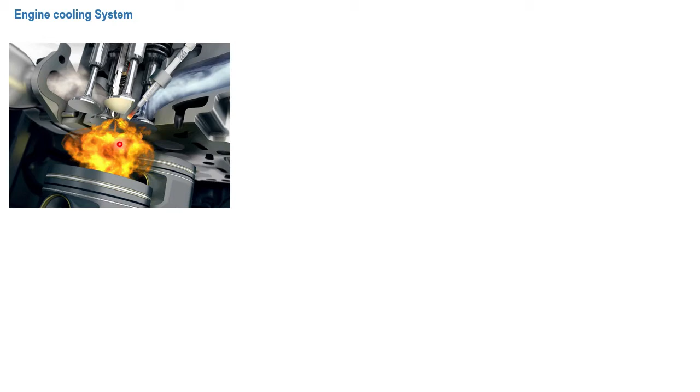Friends, before talking about the cooling system, let's have a look at this figure. This is the combustion chamber of the engine. In any internal combustion engine, the chemical energy from the fuel is converted into thermal energy, and the thermal energy is again converted into mechanical energy by moving this piston, then through the crankshaft, and the energy is available at the flywheel.

The fact is, the complete fuel energy will not be converted into useful energy, that is flywheel energy. Whatever energy is obtained by burning the fuel is not going to be converted into mechanical energy 100%. There will be so many losses of energy, so let's discuss which losses these are.

For your information, the effective mechanical energy available at the flywheel is 42 to 43% in present generation engines. What about the balance 58% of the power? That is wasted, and majority of this energy is wasted through the exhaust gases.

Then there is heat transfer through the cooling system, because the engine has to be cooled regularly, so a certain amount of heat is carried through the cooling system. Similarly, a certain amount of heat is wasted through the lubrication system, and some amount is wasted through friction. The engine contains many moving parts: pistons, crankshaft, connecting rods, turbocharger, valves, fan, water pump, and so on. To move all these parts, a certain amount of mechanical or frictional energy is consumed. This is called frictional loss.

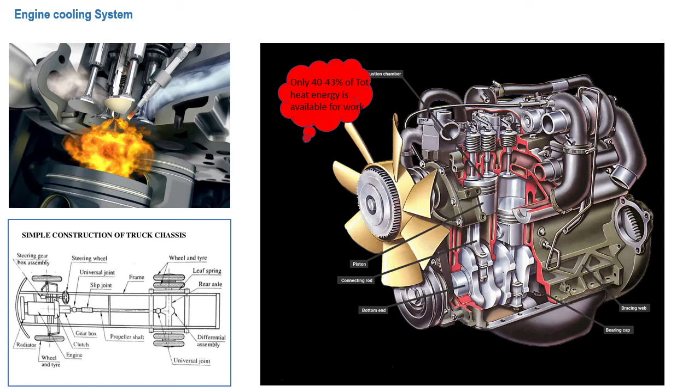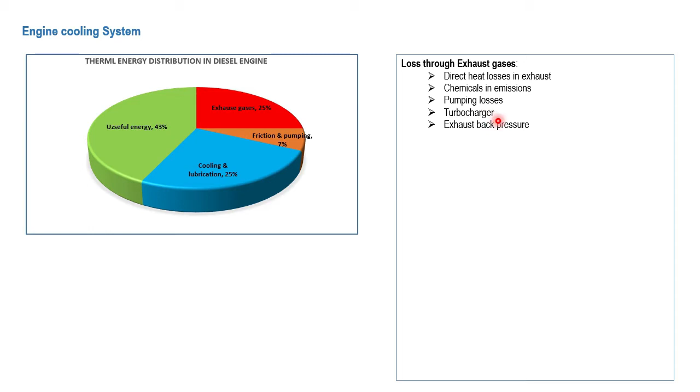These are all the exhaust gases loss. Then around 7 to 8% of the losses will be on account of friction. I explained you, running the water pump, running the turbocharger, running the camshaft, running the crankshaft, piston, valve train, fan, so many other moving parts, and also lube oil pump.

Then around 25% of the heat energy is lost through the cooling system and lubrication system, because these liquids always carry the heat along with them and dissipate into the atmosphere. Then the net available energy at the flywheel will be around 43%.

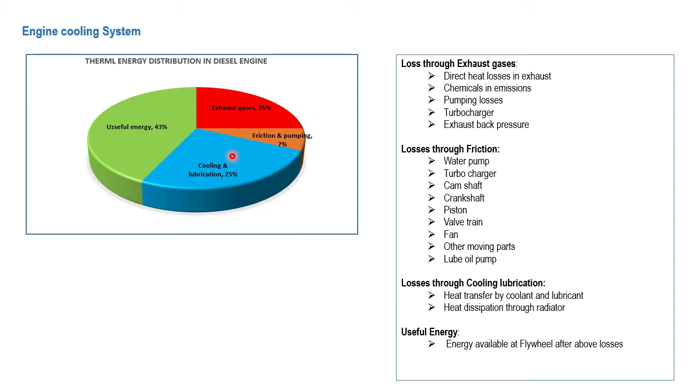So I told you all what is meant by thermal efficiency. The present generation engines are being produced with thermal efficiency of around 43%. And if we go back, the engines produced in the 1960s were operating with 32% thermal efficiency, and 68% losses were there on this account.

And the engine produced by diesel in the beginning was having 17% thermal efficiency, because its size was very huge and the power obtained at the flywheel was very minimum. So balance around 83% power was lost on account of all these activities.

Now the engineers are aiming to reach the thermal efficiency to 55%, meaning increasing the thermal efficiency and minimizing the losses. So how can the thermal efficiency be increased, and which are all the factors affecting or influencing the thermal efficiency?

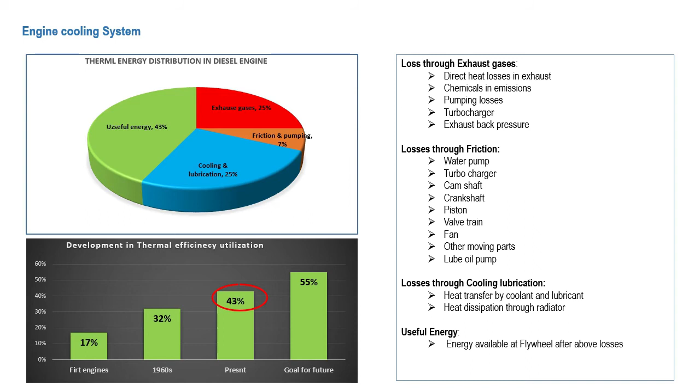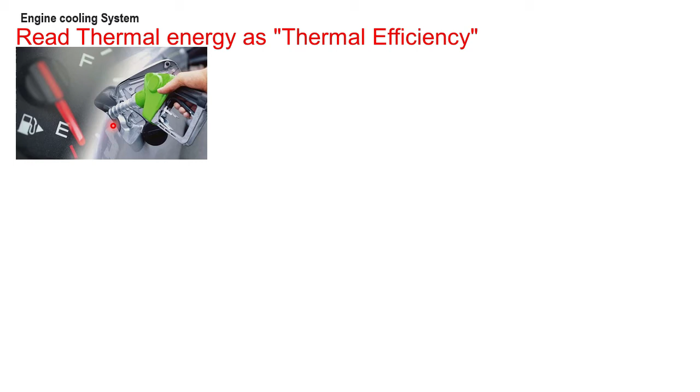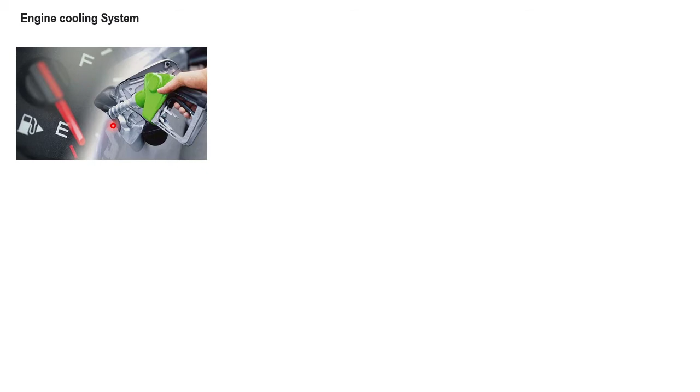The quality of the fuel is one of the influencing factors of thermal efficiency, and its additives. What is the quality of the fuel? Calorific value, ignition quality, sulfur content, specific gravity of the fuel, water content in the fuel, flash point, and carbon residues, etc. Next comes fuel injection pressures and fuel injection technology.

You can see the old model engines are with mechanical injection systems. Now more engines are coming with electronic injection systems, which work with very high pressure injection with precision governing mechanisms, so that the optimum amount of power can be obtained from every drop of the fuel we burn.

Then comes the fresh air charging system. How does the fresh air charging system influence this? The density of the air varies depending on the altitude of the place where we operate. As we go to higher altitudes, the density of the air drops, so the oxygen content also drops. When the oxygen content is dropped, naturally the engine power also gets affected. So that's why the charging air intake is also important.

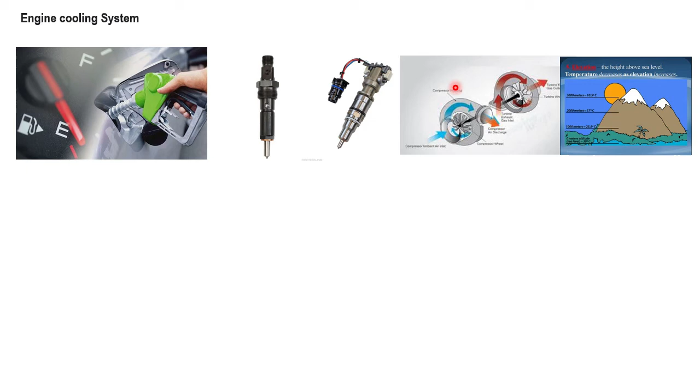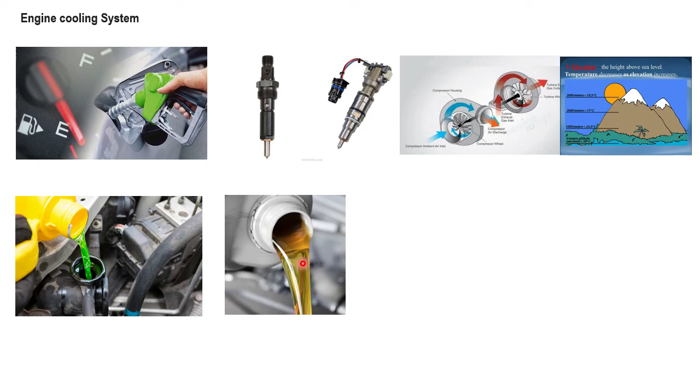Next, exhaust gases also influence the thermal efficiency. Then the cooling system, mainly the coolant and additives and other parts involved in the cooling system. Then the lubricating oil quality and its additives - additives in the sense, as we discussed in the lubrication system, all these additives. Then engine components and its design.

So in a compact engine, higher power is produced. In a bulky engine, lower power is produced. This is called the power to weight ratio. What is meant by the power to weight ratio? This is the ratio of the engine power output, in kilowatts or horsepower, to the weight or mass of the engine, in kgs or lbs.

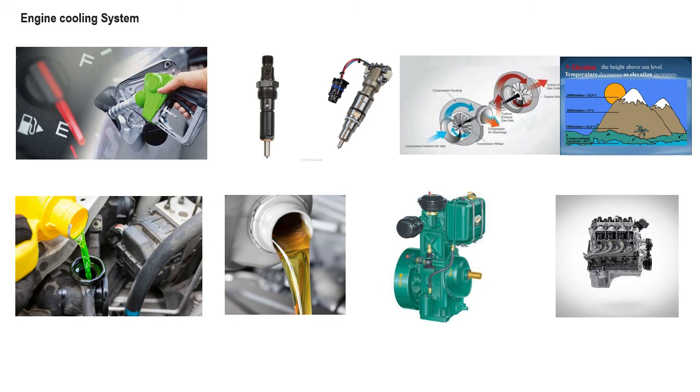For example, an engine weighing 2000 kilograms produces around 300 kilowatts. Its power to weight ratio will be 300 divided by 2000, that is 0.15. If we can produce the same 2000 kg engine at around 350 kilowatts, its power to weight ratio will be 0.175. So we have increased the power to weight ratio by optimizing the fuel consumption, charging more air, and adopting the latest technology in the fuel injection system, and so many other things. So the power to weight ratio also factors into the thermal efficiency of the engine.